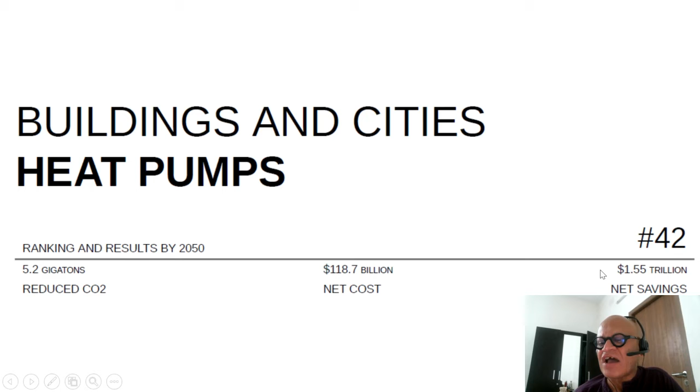Okay, up here in buildings and cities, we have next heat pumps. The ranking by 2050 is number 42 with 5.2 gigatons of reduced CO2 by then. $118.7 billion in net cost, but $1.55 trillion in net savings.

Obviously, the world is warming up and demand for AC is going up. Here is Robert Simmer, director of Stadtwerke Amstetten.

I have no idea how to say these things.

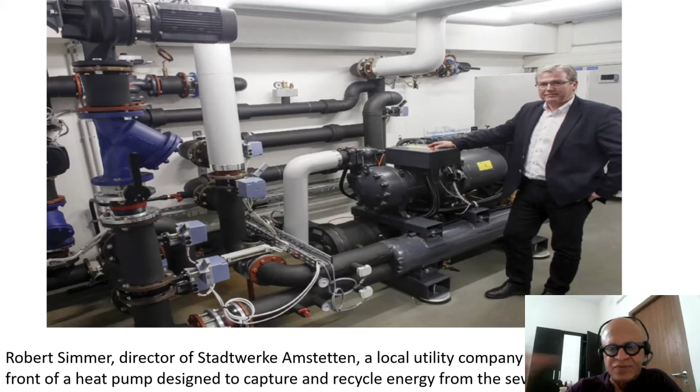A local utility company in Austria stands in front of a heat pump designed to capture and recycle energy from the sewer. So sewer has got some steam and energy in it that can be captured, and you know that in big cities with the grids over those pipelines or the canals, homeless people try to use that steam energy as well.

Let's look at some of the numbers first. The building sector energy intensity in selected regions in sustainable development scenarios going from 2000 to 2030, and this is some sort of an index which is set at 100 for 2000, and then it's tracked for up to 2030 for various regions: Middle East, China, Central East, Central and South America, and so on.

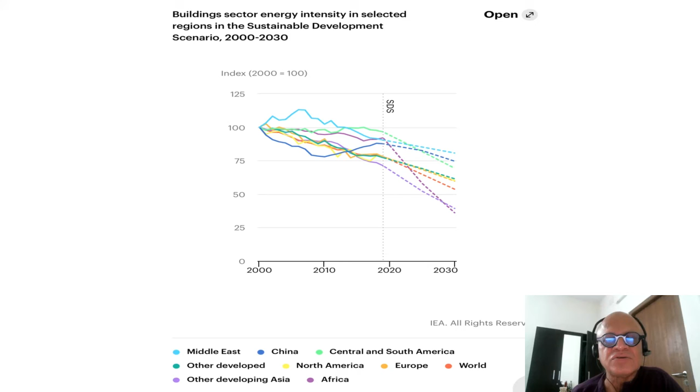And the main idea is that the sustainable development scenarios want them to drop in terms of the energy intensity of the building sector. The heating and cooling, and of course the lighting and the other computers, refrigerators, bathrooms, etc. use up lots of energy. So building sectors do use a lot of energy, and here is another way to look at it.

So this is building sector electricity consumption in quadrillion British thermal units, another unit altogether. This is from US Energy Information Administration and International Energy Outlook. So it's looking at 2010 to 2050, and there is the historic period.

So you can see that the non-OECD countries, OECD is of course the Organization for Economic Cooperation and Development. This includes a lot of the global south, which are still running on a very inefficient system. So their energy consumption is expected to continue to rise in terms of building sectors.

Electricity consumption per capita in the buildings in million BTU per person. So OECD is up here, and non-OECD countries are down here. So you can see the difference in terms of OECD countries having a much more comfortable building settings where the energy consumption per capita is higher, but the electricity consumption by the building sector is lower, whereas here the per capita consumption is lower, but obviously the population is higher as well.

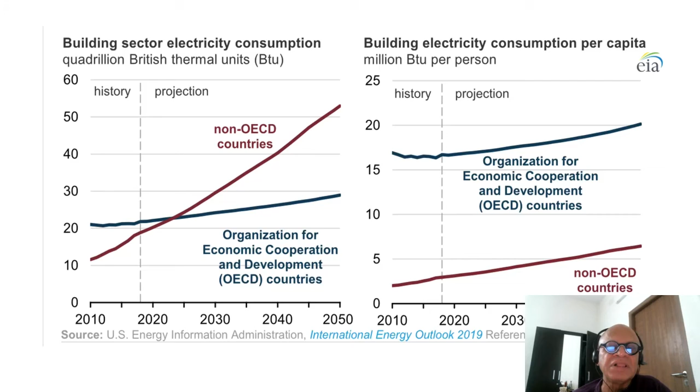So it depends on what you look at, but nonetheless the main message is that the buildings are a major consumer of energy when we look at the overall consumption of various sectors like agriculture, industries, buildings and transportation and so on, right?

Global air conditioner stock from 1990 to 2050. I just wanted to show that countries like the United States are pretty much saturating, whereas China and India have a long way to go in terms of the percentages of households that are still not equipped with air conditioning. As they grow economically and they warm up, more and more people are going to crave air conditioning, and they're going to buy air conditioners.

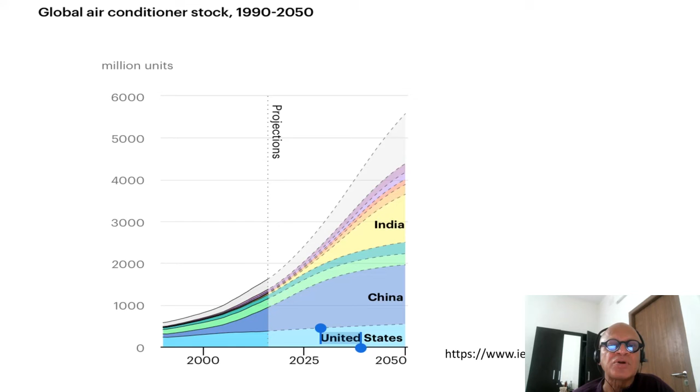So unless this is controlled with proper cooling technologies for the future, it's not going to be good for global warming. This is from the IEA scenarios for out to 2050.

World space heating and cooling final energy use, 2005 to 2050, suboptimal and state-of-the-art efficiencies. I'm not going to go into the details, but I'm saying that there are scenarios where state-of-the-art heating and cooling can significantly reduce the petawatt hours per year consumed for space heating and cooling.

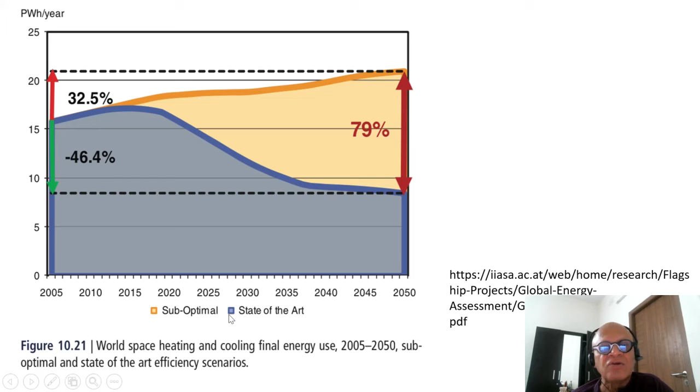How does it happen? This is where the heat pumps come in. So looking at the IEA projections out to 2030 in terms of fossil fuel based equipment, conventional electric equipment, district heating, other renewables and hydrogen based and heat pumps, you can see that there is a tendency for heat pumps to increase, especially in the sustainable development scenarios for 2025 and 2030. The heat pumps go up.

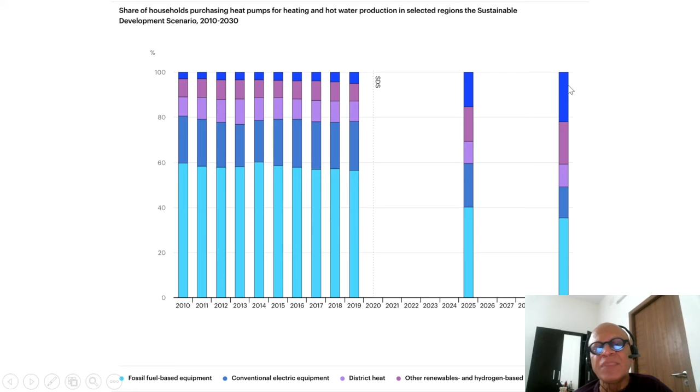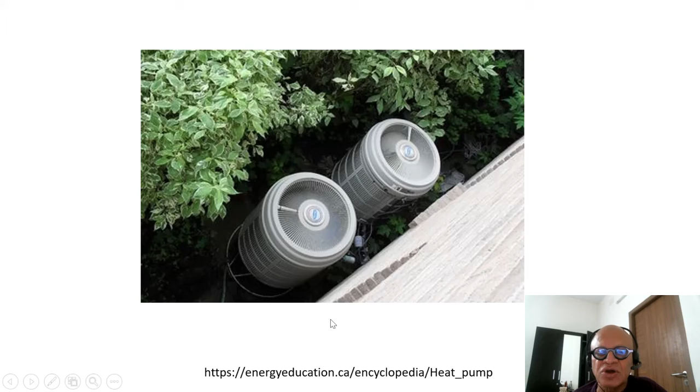So the heat pumps basically have an external unit like this, which you may have seen. This is from energyeducation.ca. So it's showing the heating cycle and the cooling cycle. It's like refrigeration basically, as opposed to air conditioner. So the energy is moved here from outside to inside. So heat is taken in. It could be water, air, or even geothermal. It depends on where you're getting the outside heat.

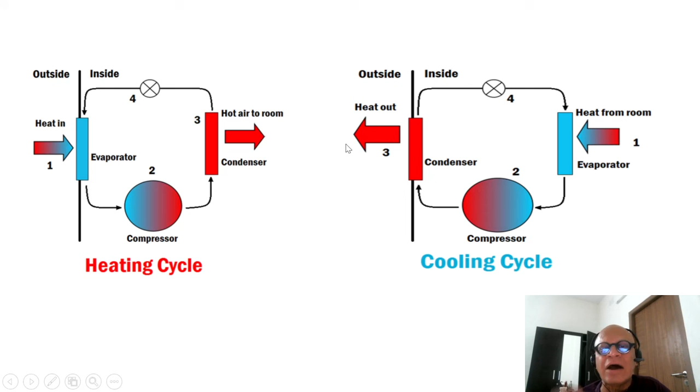So that is going through an evaporator and a compressor and creating in the condenser hot air that is going to be supplied to the room. So this is the heating cycle, and then you have obviously the exhaust back to the outside. So this is a heat pump in a heating cycle, and in the cooling cycle you are actually going to take heat out of the room through an evaporator and compressor and into a condenser, and going to put the heat out to the outside. So this is the difference, and there are advantages and disadvantages.

Greenmatch.co of the UK provides this list. So Greenmatch illustrated the essential heat pumps benefits and drawbacks in the following figure. So heat pump advantages: it has low running costs, less maintenance, safer than combustion based systems. So usually you use some kind of electricity, fossil fuel based or renewable for running air conditioners. Reduce your CO2 emissions, which is what we are looking for. Provide cooling during summers and heating during the winter. Long lifespans, so more than 50 years, extremely reliable. Renewable heat incentive scheme, so that's a specific UK scheme.

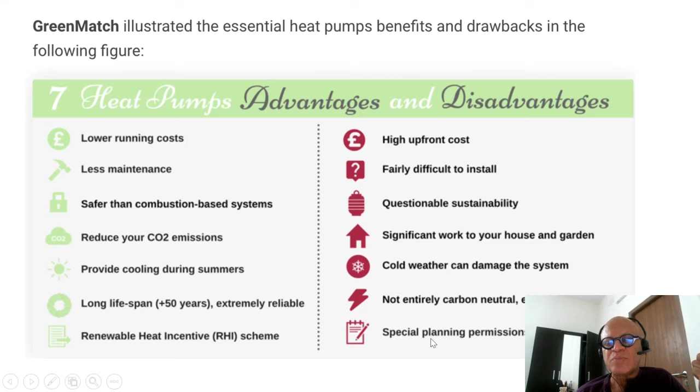Of course, there are some disadvantages. The cost up front is high, fairly difficult to install, questionable sustainability, significant work to your house and garden. Cold weather can damage the system because you have this big unit outside. Not entirely carbon neutral. Electricity is required, of course, but we are looking for efficiency and drawdown, and special planning permissions may be needed based on where you are.

Okay, so this book argues that heating and cooling of residential and commercial building space requires more than 13,000 terawatt hours of energy and is estimated to increase to more than 18,000 terawatt hours by 2050. This energy use comes from on-site fuel combustion and electricity-based systems, from gas furnaces to air conditioning units, and we saw that air conditioning demand is going up. High-efficiency heat pumps reduce fuel consumption to zero and use less electricity to generate heating and cooling. This is the big message.

Current adoption is low at 0.02% of the market, but we estimate rapid growth as costs continue to decrease by up to 25% by 2050. Okay, so the upfront cost is high but is expected to decrease. For a cost of 119 billion in addition to what would be spent on conventional technologies, operating savings could reach $1.5 trillion over 3 decades and 3.5 trillion over the technology's lifetime. So they do have a long lifetime, 50 plus years.

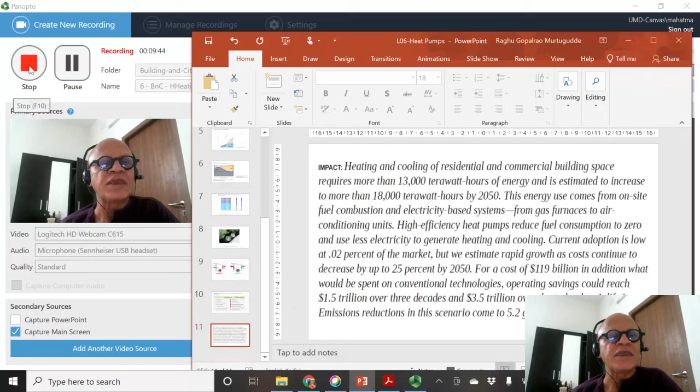Emissions reductions in this scenario come to 5.2 gigatons of carbon dioxide. So heat pumps require some socio-technical transitions, but it is again argued to be a no regret solution, good for drawdown.